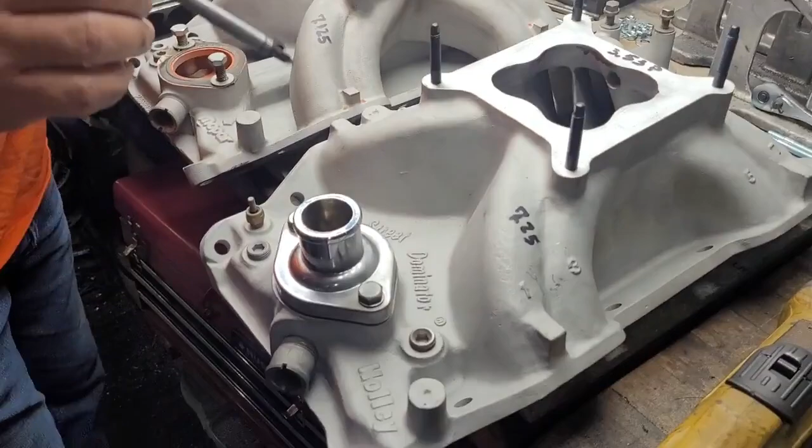So the first intake we're going to do is this Holley Street Dominator right here. It has a clover intake and a high roof on the intake port. This is as cast, and if you can see, this has never ever been run.

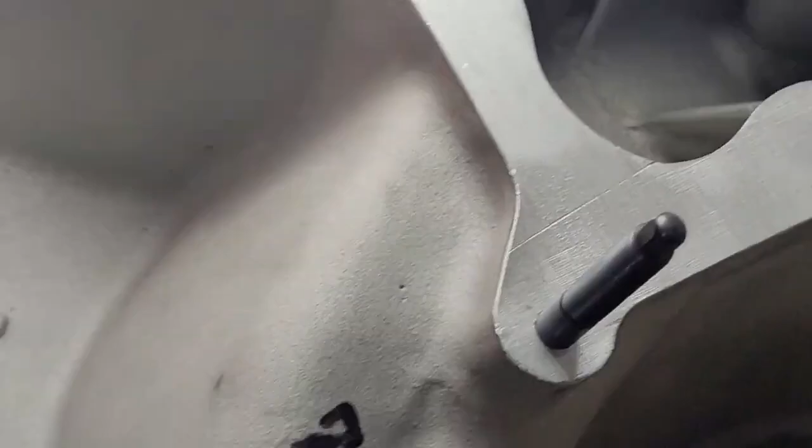I got this in the direct connection box, that's how old this is. Never run. And it's a street intake manifold because it has a water passage here.

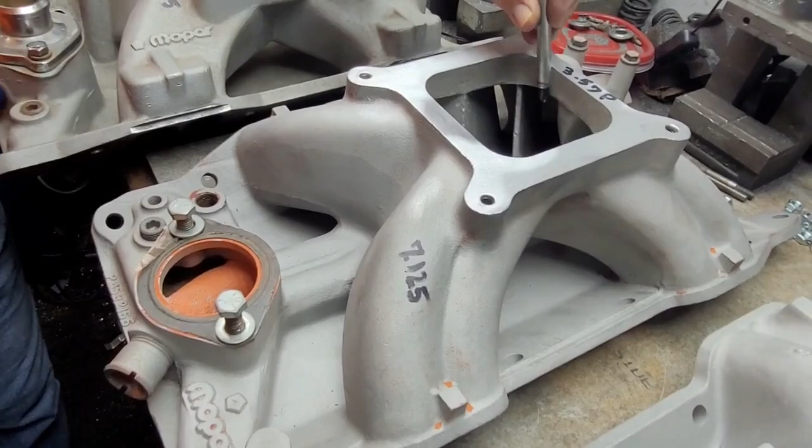Heats up the plenum. And then we have the Mopar M1, same thing. It's a little bit of a rip-off, but it's not very contoured here. It's quite sharp. They're very similar, but you can see the huge difference between this one - this is sharp too, but it's been laid back more than that. This one is almost vertical.

Yeah, and this is still as cast. The Holley Street Dominator is brand new out of the box. I did a little poke, but this one hasn't been touched. This has not been touched. This is still as cast.

Our third manifold is the Mopar M1 Race W2 intake manifold with bosses here for your nitrous or fuel injection, however you feel adventurous, and it is not water heated. Another thing about this intake - it's for the 9.2 deck height block. Stock is 9.6, this is for the 9.2, and they had a shorter one at 9-inch for the race blocks.

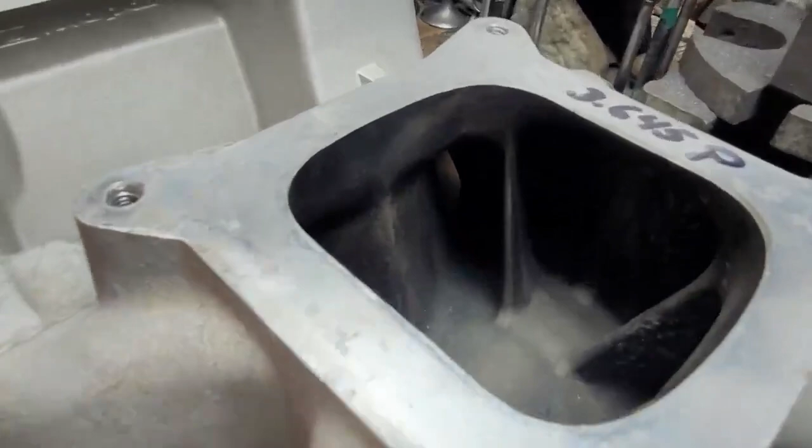This one has been ported. Someone did actually a pretty nice job on it, and I'm sure that'll show up when we do our flow tests. Yeah, it's kind of nice in there.

We have a returning sibling - this looks like the tunnel ram we tested earlier. Not so. It has W2 oval ports down low. Otherwise it's pretty much identical, just the outline - the intake ports are oval.

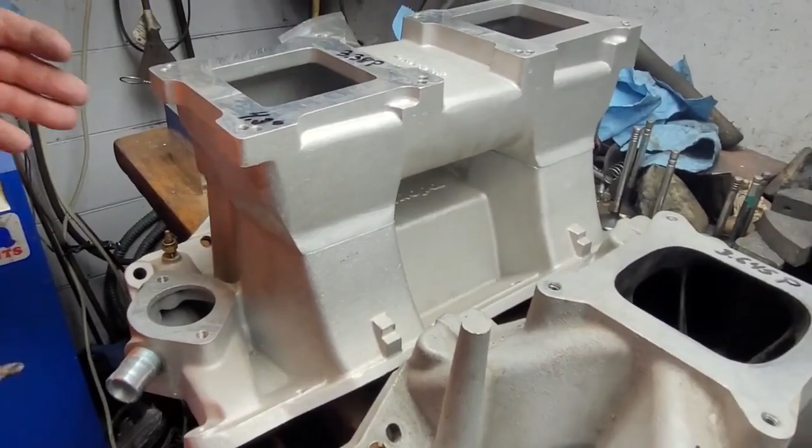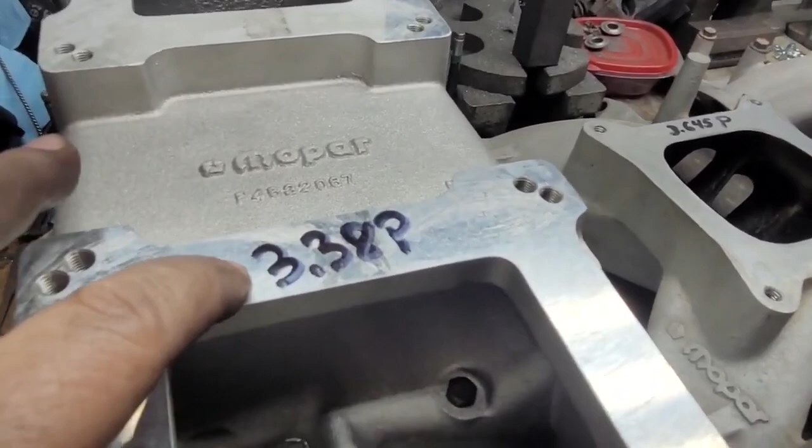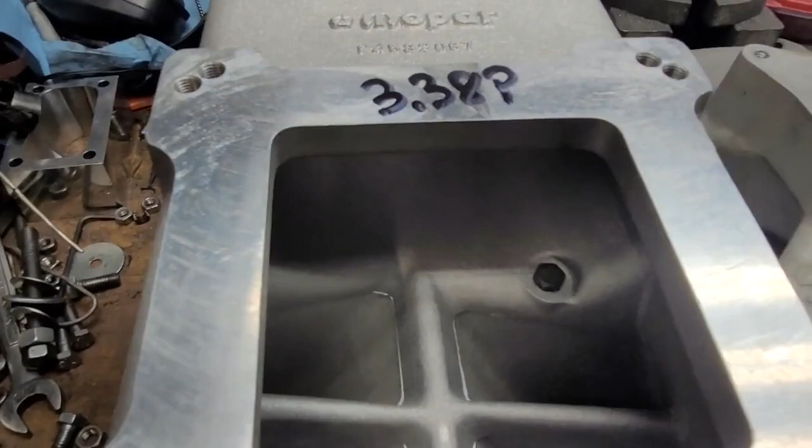All right, some quick specs on them. I took the depth of the plenums: 3.38, 3.645, 3.57, 3.53. The race manifold's a touch taller, and the tunnel ram doesn't need to be quite so big because the plenum is absolutely massive.

You can see right through to the other side. The engine thinks the whole world is just air and fuel, which is a beautiful thing, really. It is, it really is. I've heard people say 'Oh, I think it's too big,' and I don't know - I would love to know.

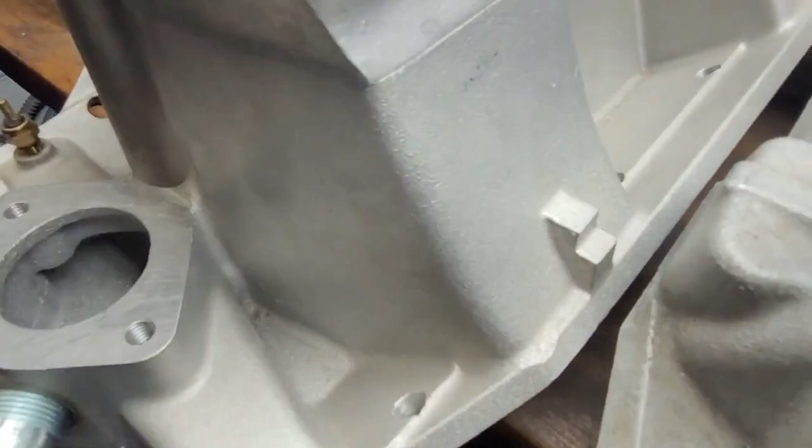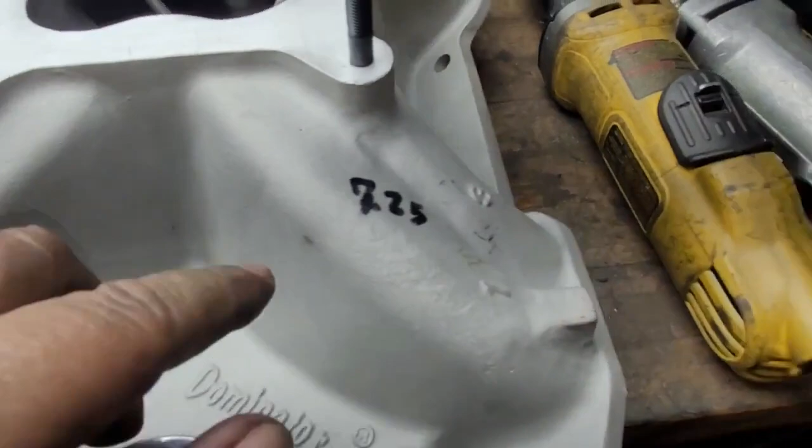The other thing I did is I took the length of the runners. Now this one's 4.3, but the runner literally starts right about here, so it's quite short. The Mopar Race is 7.5, the Mopar Street is 7.125, and the old Holley Street Dominator is 7.25. So they're all a little bit different.

You can see differences in the plenum. This is a relatively flat floor. You can see just a bit of an angle right here on the side. This one is almost identical to this one. This one looks like the angle is a little bit steeper.

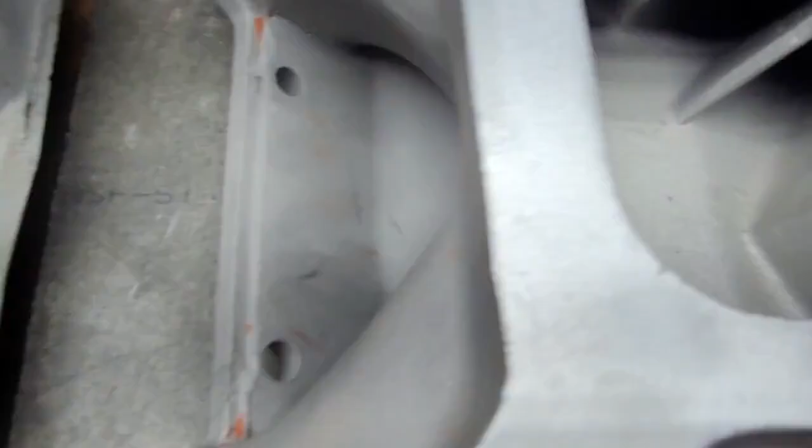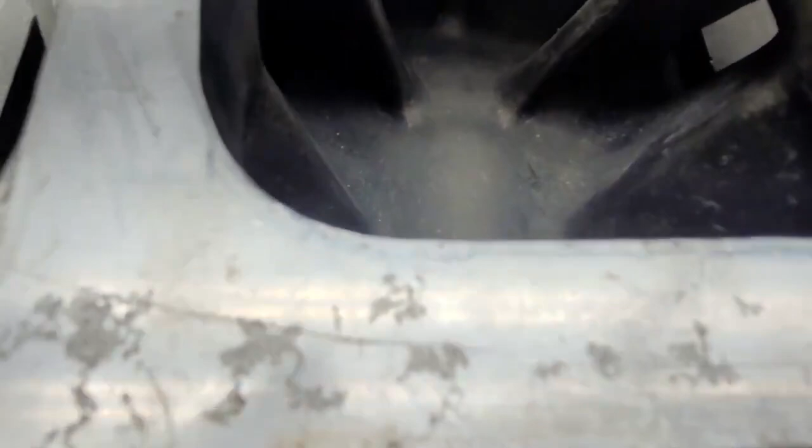This race manifold's got a nice curve. I like the curve myself, I'm partial to a curved floor. There was some work done in there, obviously - like you said, it looks really nice. Whoever did the work, it's pretty good, probably not his first time doing this manifold. No, it doesn't look like a first rodeo.

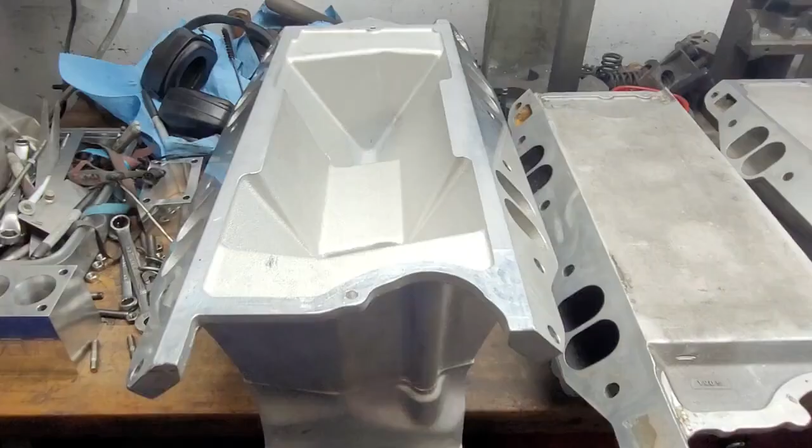Let's flip them over and take a quick look at them. Okay, we'll flip them upside down to give a quick look.

Huge empty valley - take a look at the unbelievably gorgeous casting this tunnel ram has. It almost looks like the same texture I put on my ports. It's amazing, and that's right out of the box, never been touched. They're all that pretty. I can't remember the last time I saw a manifold that was casted that nice.

Beautiful. The race manifold had work done to it, like I said, and whoever did it did a nice job. They look pretty darn good.

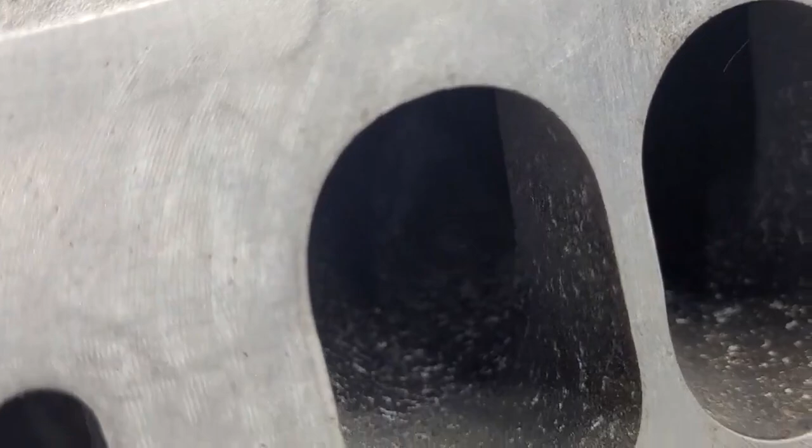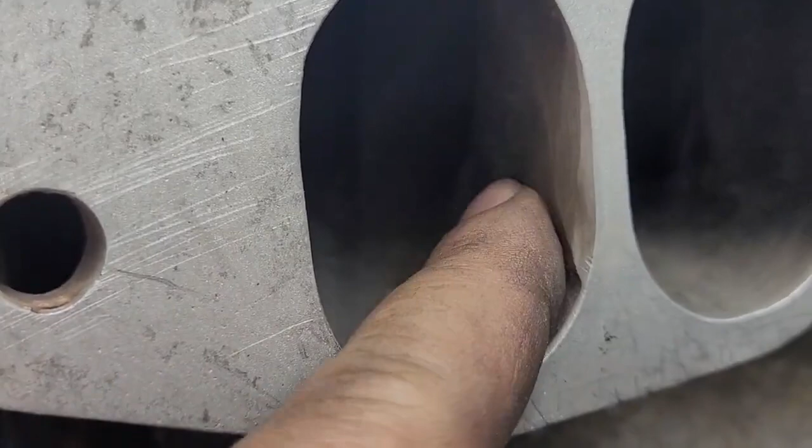This one, it looks like somebody did some blending, but they didn't quite finish, so that could use a little cleanup. But for our flow test that we're doing today, that ain't happening. That's a run what you brung. It's a run what you brung.

And this old Holley looks pretty decent, actually. You can see the original rough cutter at the opening that was done at the factory, I'm sure. Overall, yeah, it's got a little chunkies in the manifold, but that's no big deal.

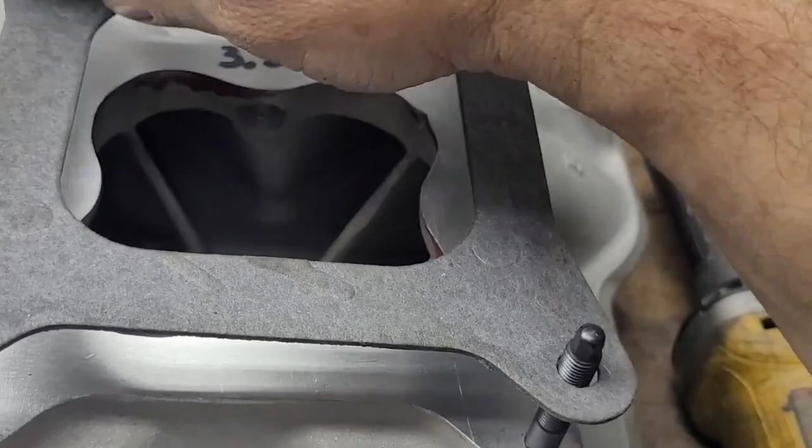We should mention that the Holley's got a cloverleaf plenum, and as we drop the gasket on top, you can see the cloverleaf actually doesn't quite clear the gasket. But will that interfere with the barrels of the carb? Good question. Everything else has just got the regular Holley-sized opening, but this one's actually a little ovalized. Some of the bow tie manifolds had an ovalized opening, Chevy bow ties had an oval opening, and the tunnel ram is just a big rectangle.

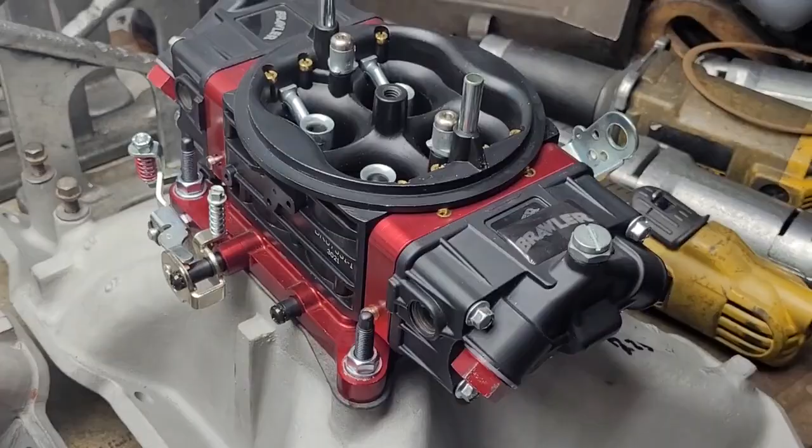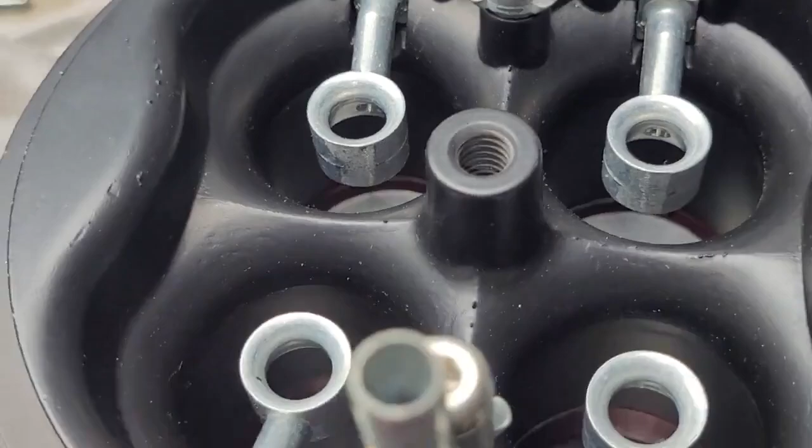Okay, we got a Brawler 750 carb. It's got really nice down leg boosters in it. I kind of like them, not as much as I like annulars - I like annulars better. But it's got a nicely sculpted radius going into the carb. It's a nice piece, I really like it. I mean, it's the first one I've seen.

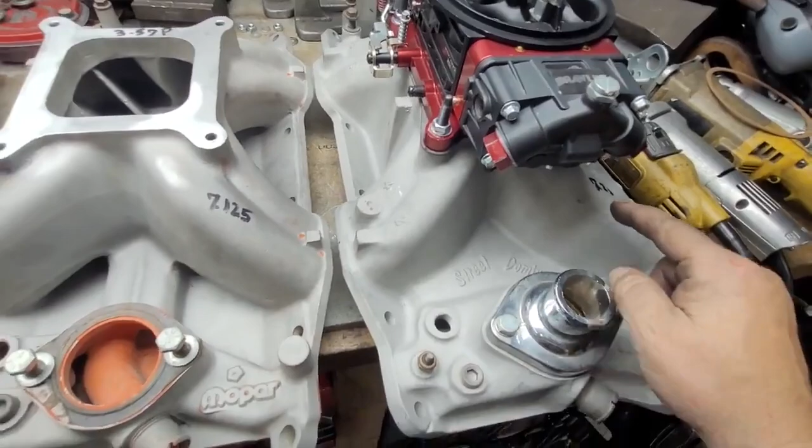Rob says it's one of the cheaper line of carbs, but it looks really good to me. So we're going to bolt this on the bench, and what I think we're going to wind up doing is a heads up between these two street intakes. We'll get the flows from these. Now, I don't know if I'm going to flow any more than just the single runner in the front of all of them.

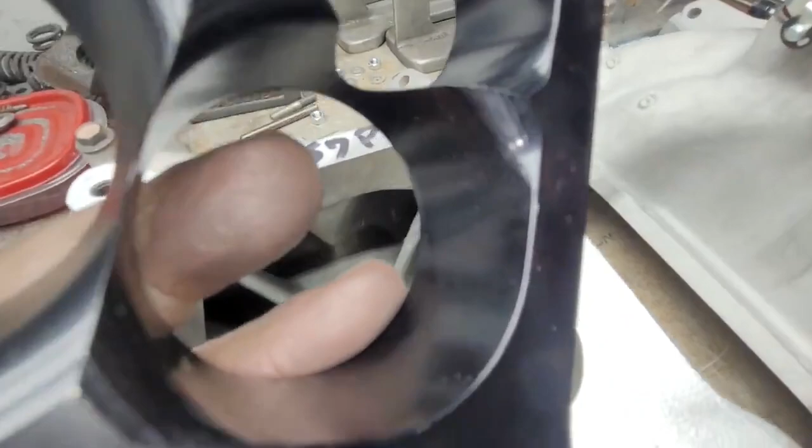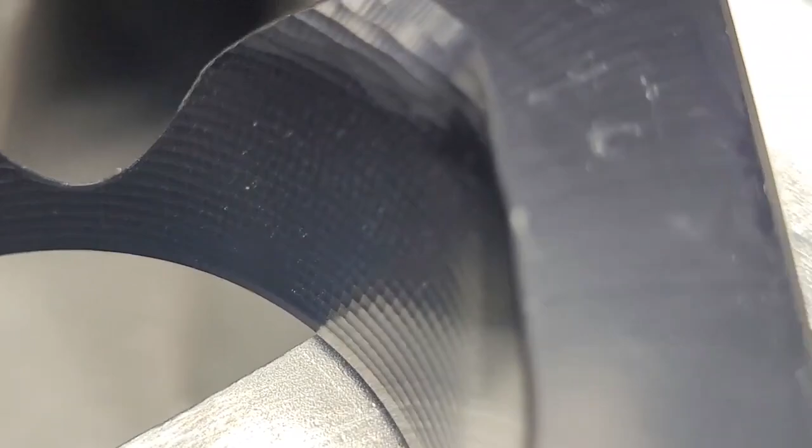He did bring a nice Wilson spacer, a tapered spacer. It's a relatively nice design. I like - let's see if you guys can see the little ridges in there. Let me see if I can blow that up. They left the ridges from the CNC just exactly the same as I had Brian leave the ridges in this spacer he made for me. So I actually like that. You know, a little extra fuel prep don't hurt.

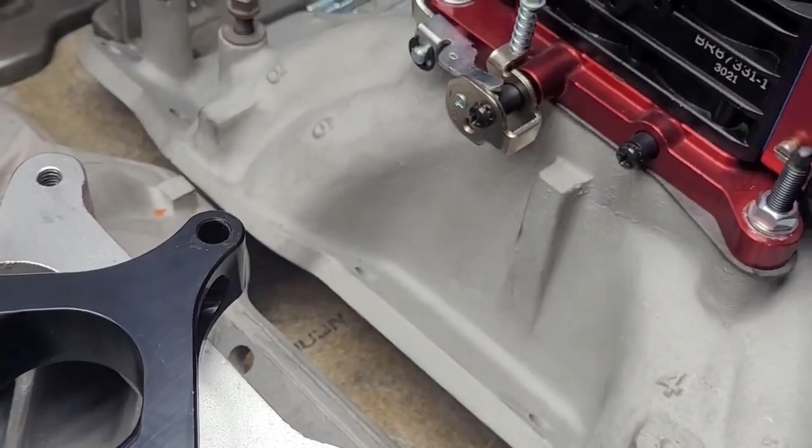All right, guys, we're going to get busy on this, and we'll see how much damage we can do. Okay, we're all set up. Here's our 750 Holley Brawler carburetor. It's a double pump, chokeless. And we're going to be testing the Holley Street Dominator first. Fire in the hole.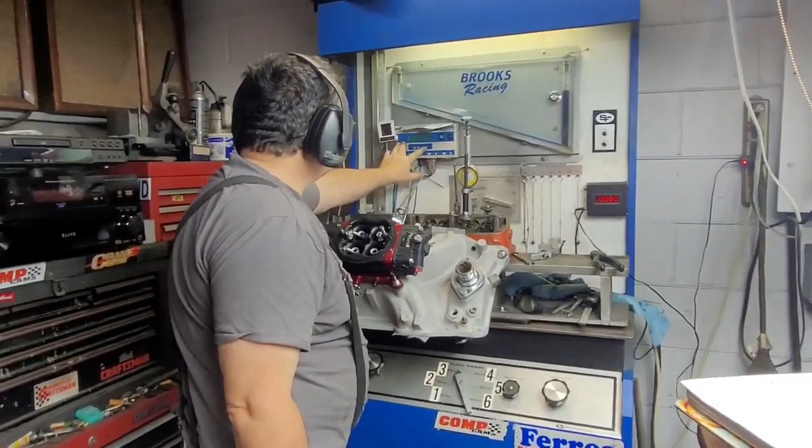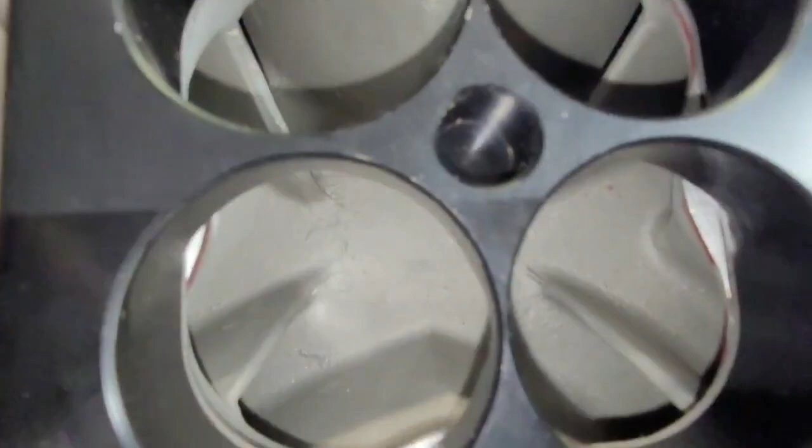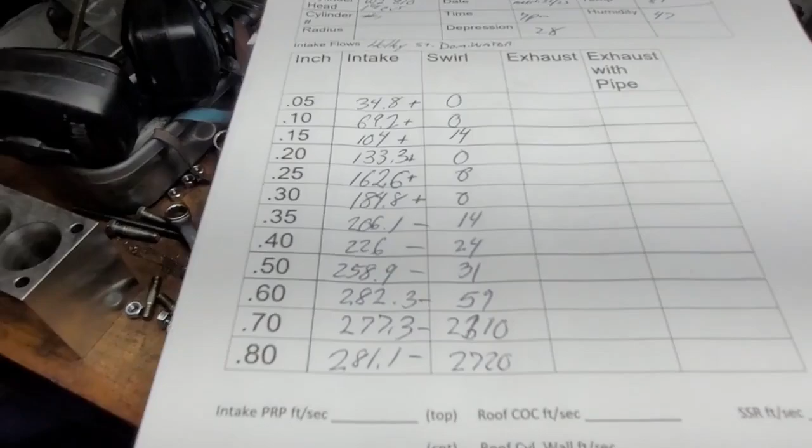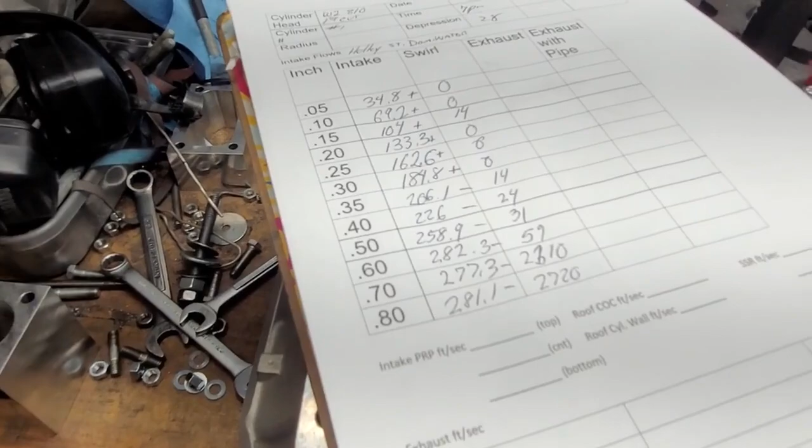All right guys, I hit the wrong button by accident, but I wanted to show you how nicely this Wilson spacer fits this intake. This Holley Street Dominator got some decent flows for being a bone stock intake. Very low on swirl though - until it starts going off the short side radius, it's got almost no swirl. That I think I would look at if I was driving it around on the street, but if you got enough compression in cubes, you don't have to sweat it.

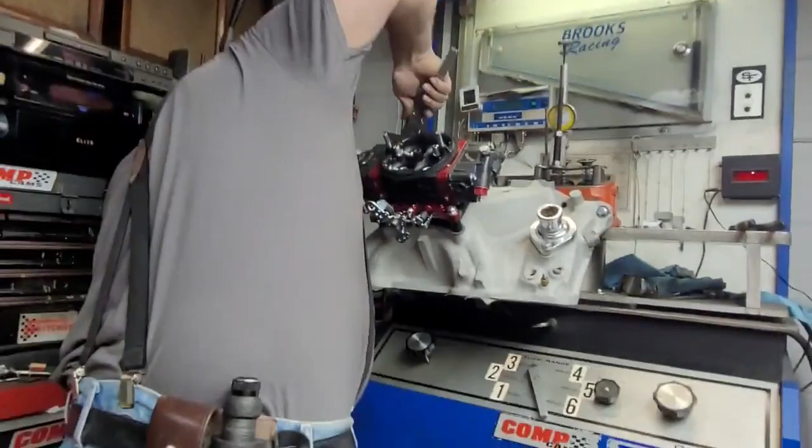All right fellas, we're back with another little tiny short clip to keep things exciting. On this, we're going to use a little Wilson spacer, half inch - four hole, you know what they're all about. Actually, I think that's a 1 inch. I'm 99% sure that's a 1 inch. Yeah, I wouldn't be surprised if it is. Measure it, Sig, we'll get a quick peek, see what Charlie measures up. 1.03, okay there we go - 1 inch Wilson 4-hole spacer. See if we come up with anything different. Fire in the hole.

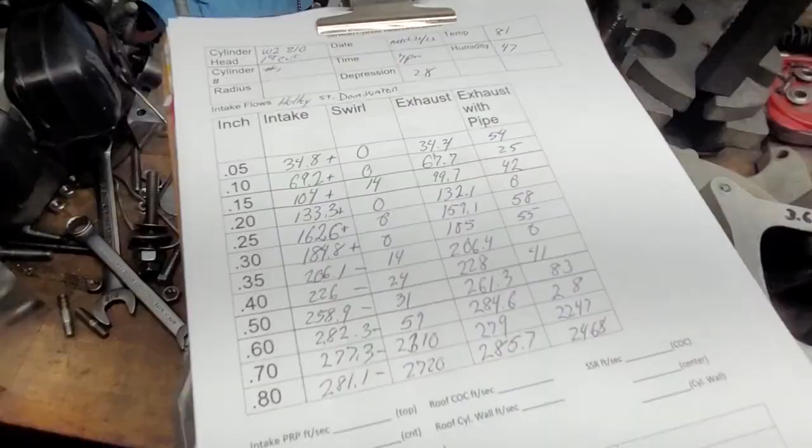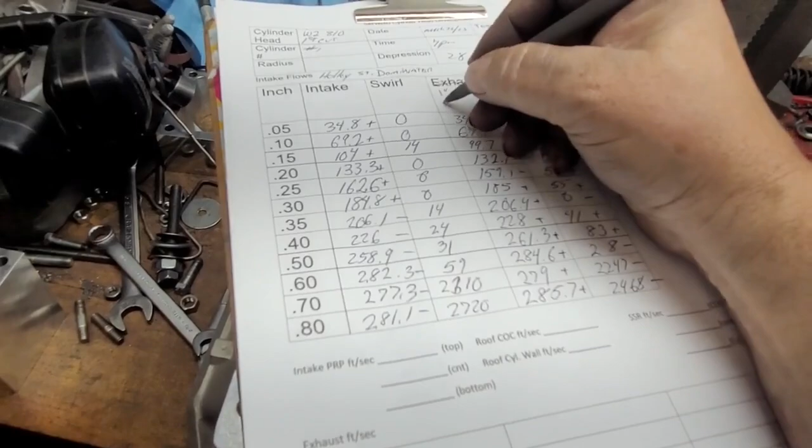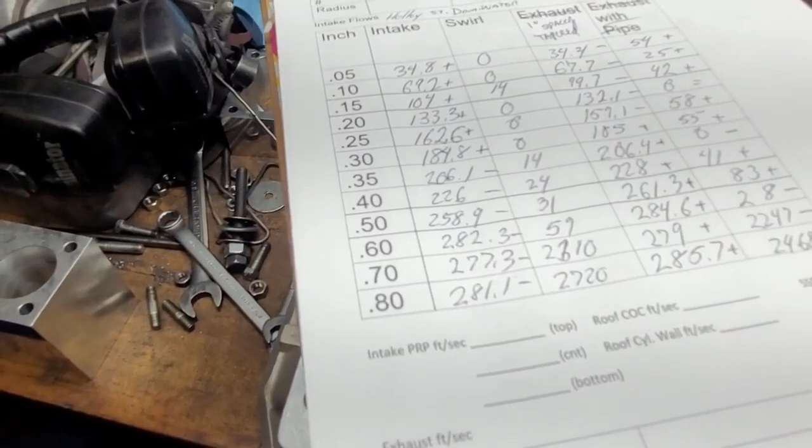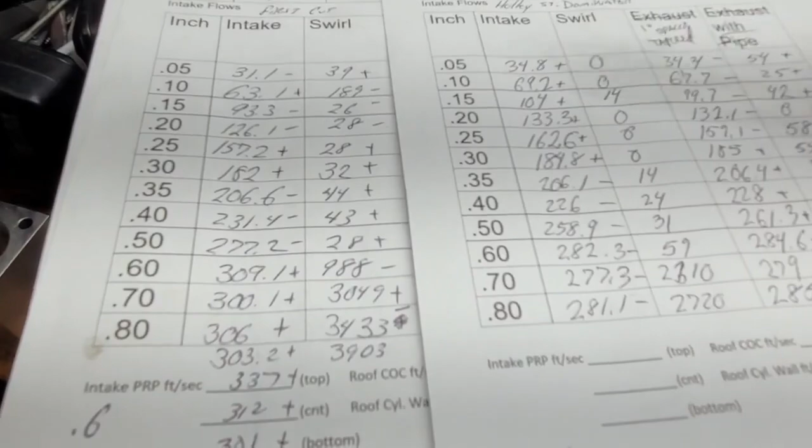All right guys, so I should write on here - this is the 1 inch spacer, tapered. And it is interesting what happened. Okay, these numbers, the pluses and minuses here, are from the bare head. Let's pull that up. Okay, you got your 810 ported swirls - that's my first cut, so this is exactly as it is under the intake manifold. So we got the intake manifold boosted all these, plus, plus, plus, plus, plus, plus.

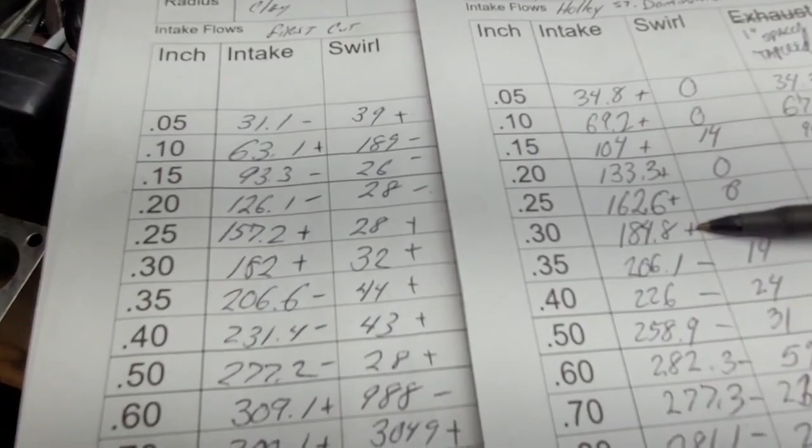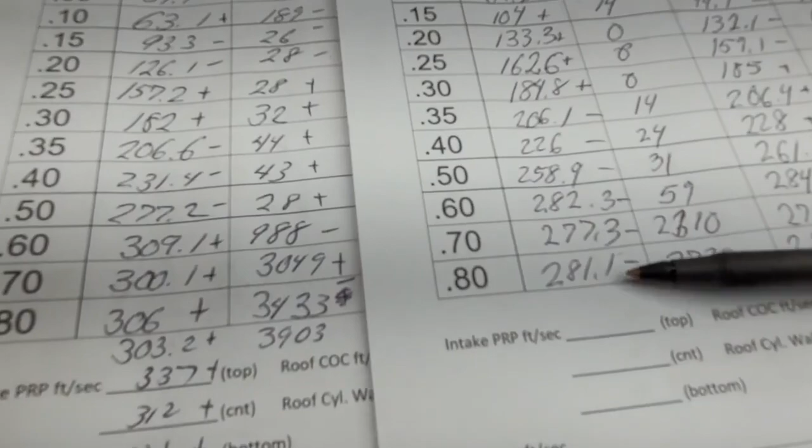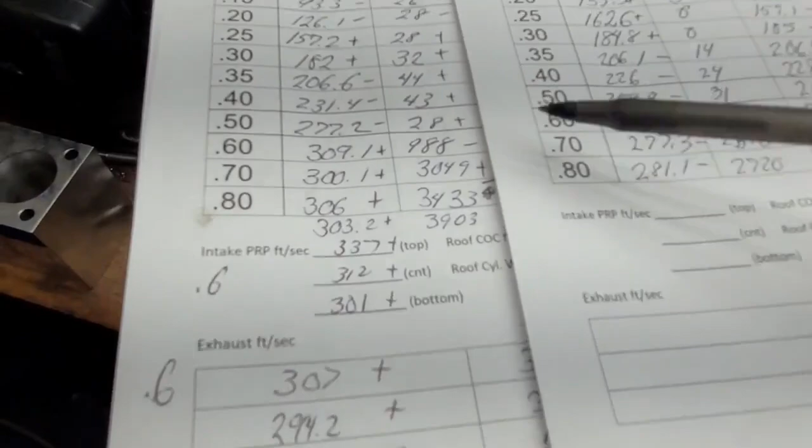Now, did it boost it a lot? Like 2 CFM at this point, not a huge amount. And we lost a little bit down on this side, but overall that is excellent for a bone stock manifold - manifold has not been touched. The swirl is what it is, it's kind of dead. It's interesting how it changed from the bare head, it actually straightened it out.

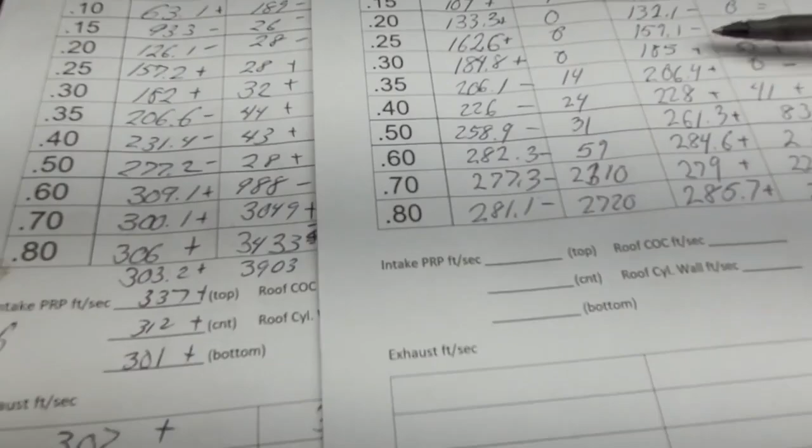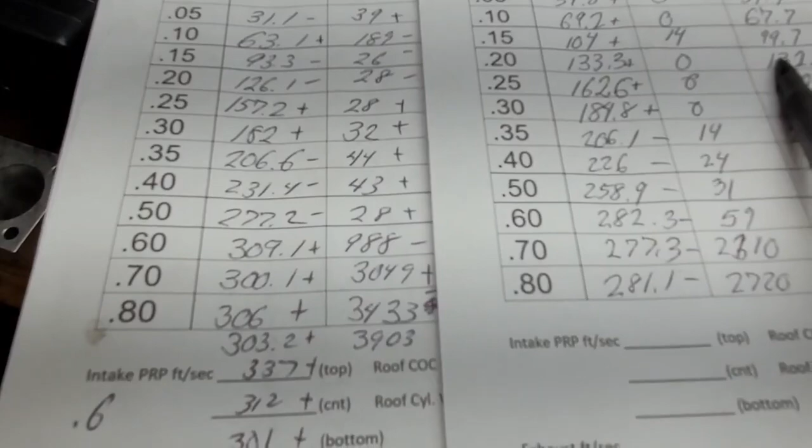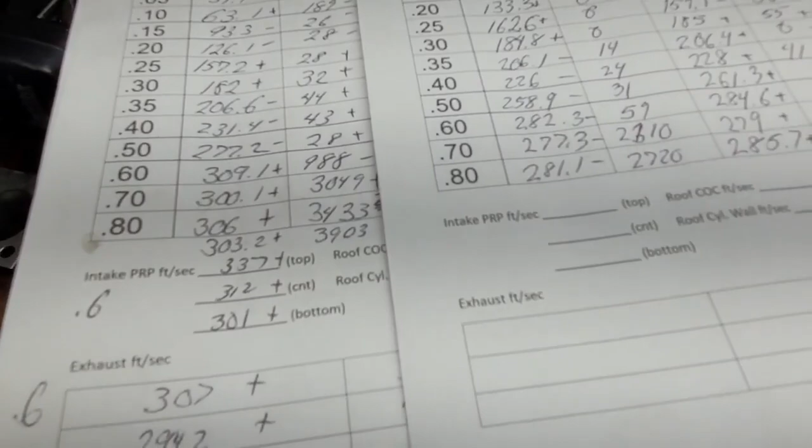Okay, and then we put the spacer on. What do we do? Lose, lose, lose, lose, gain, gain, gain, gain. The gains, were they huge? 2 and change. The losses, how much did they lose? 1 - that one's 5. All right? And it changed the swirl a little bit - plus equals plus plus minus plus plus.

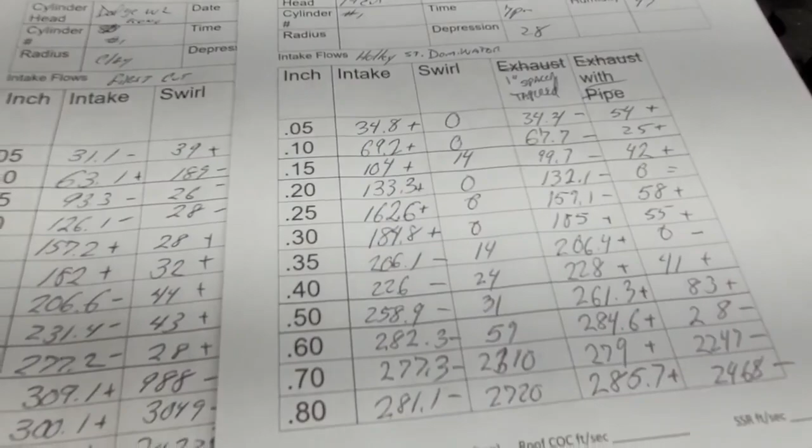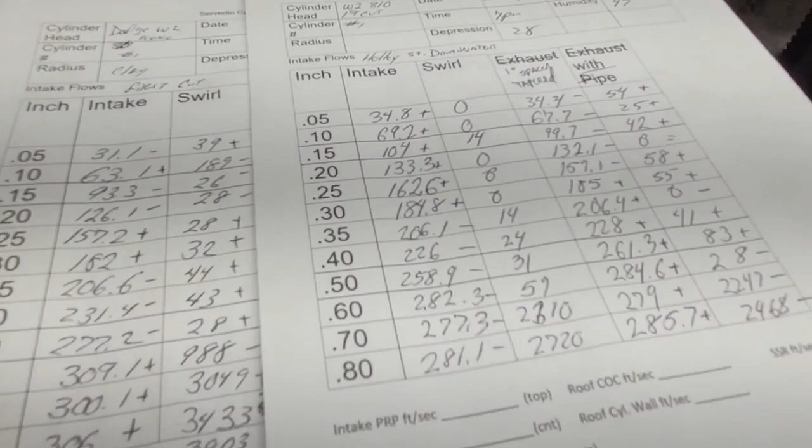Overall, I like the spacer. Added just a smidge, can't complain. And you know it's going to help that air fuel. I always liked tapered spacers, I used to make my own. I have a tapered spacer on the old work truck, I got a tapered spacer on the Chevelle, and they always worked really well for me. I would make them from scratch because I like my design a little better, but that's neither here nor there. This is still - it's a nice piece.